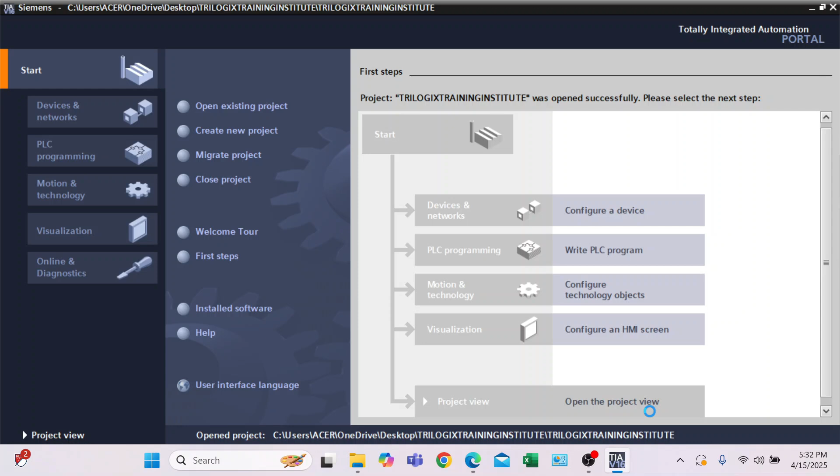So open the project view. Now we're here at our main server.

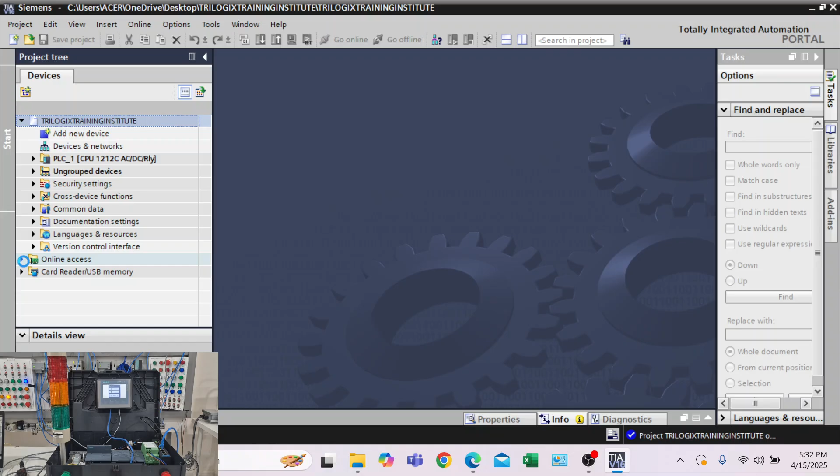If we want to check our online access, let's proceed to online access. Open it. Let's check if there is connectivity between our laptop and our CPU.

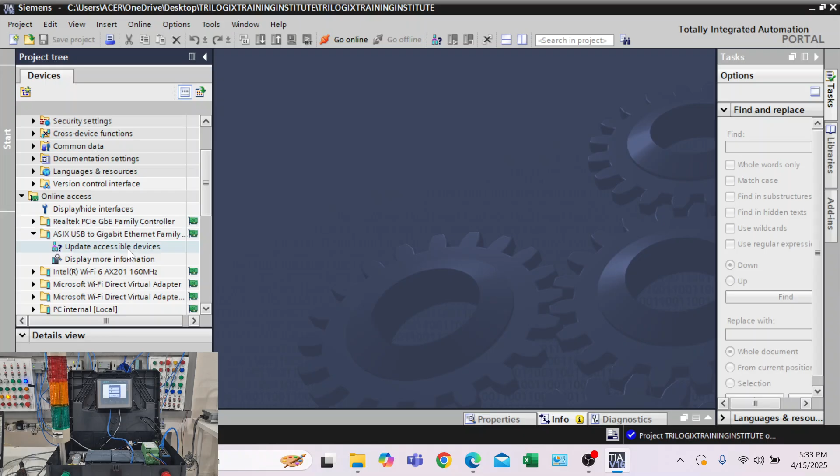Our connection is the converter ASIX. Let's click the converter ASIX, then update the accessible device so it determines who is online and where we can access the CPU. This is our PLC 1 at 192.168.0.1. Let's open that.

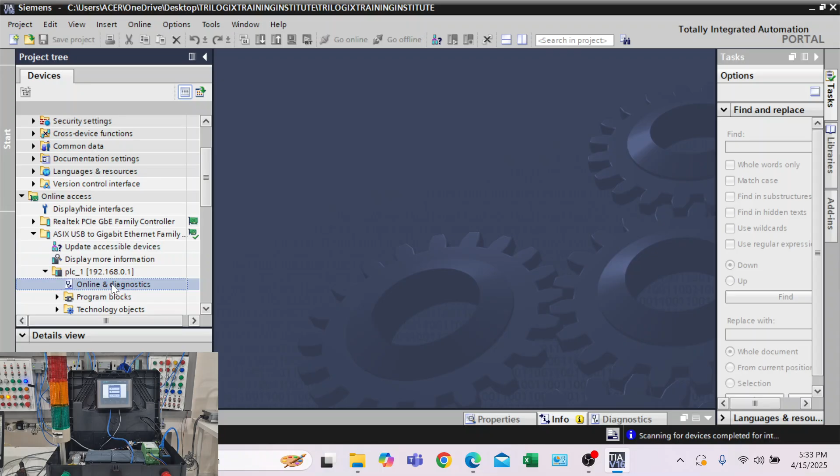Online diagnostic. Click the online diagnostic. As you can see in the functions, our topic now is IP configuration.

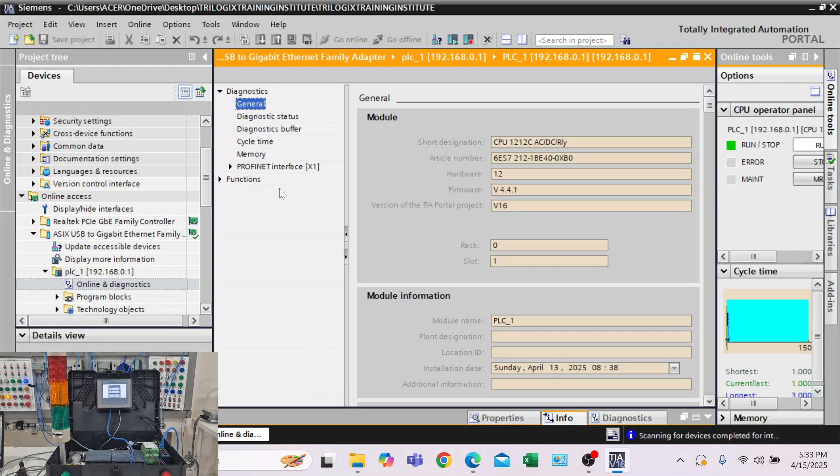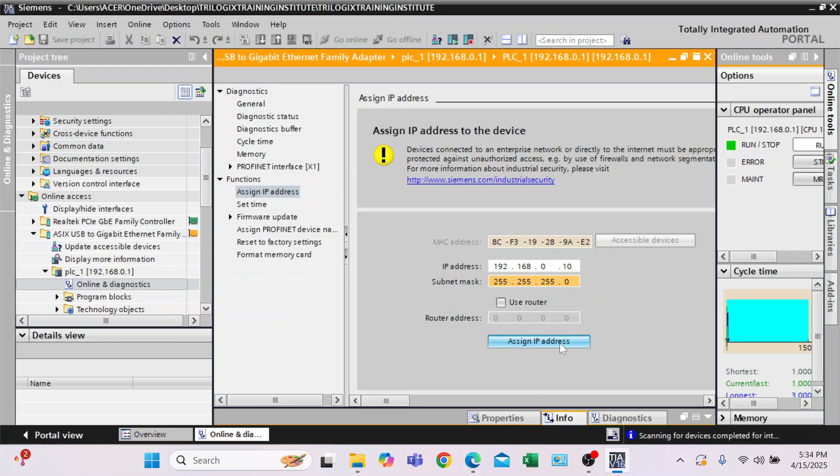Diagnostic. Let's go to our functions, assign IP address, where we can change our IP address. If we need to change to some other IP address, you can put it in assign IP address. That's fine now and good for downloading.

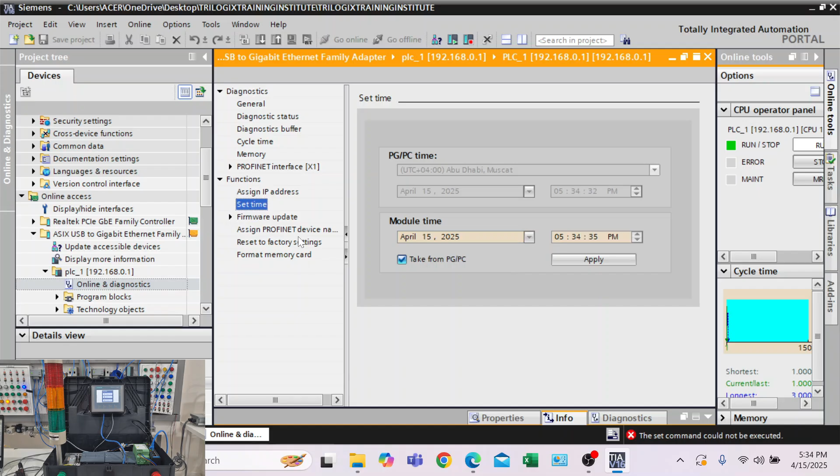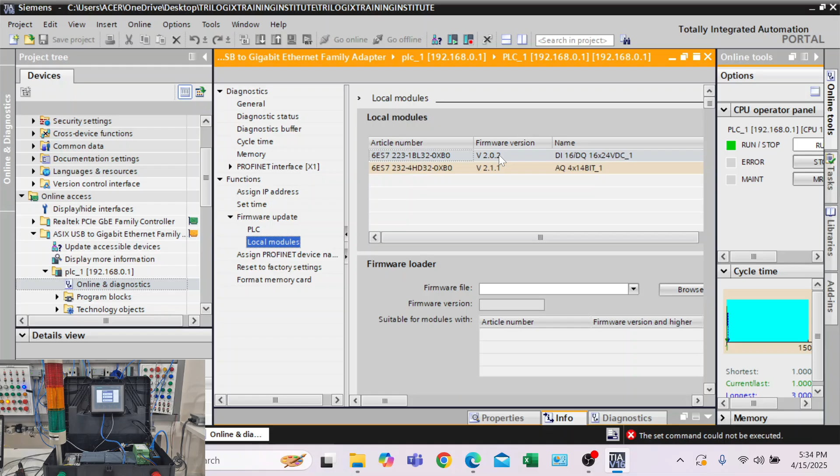As for the topology, we can also reset to factory settings if required. Just delete the IP address, then put another IP address or reset everything.

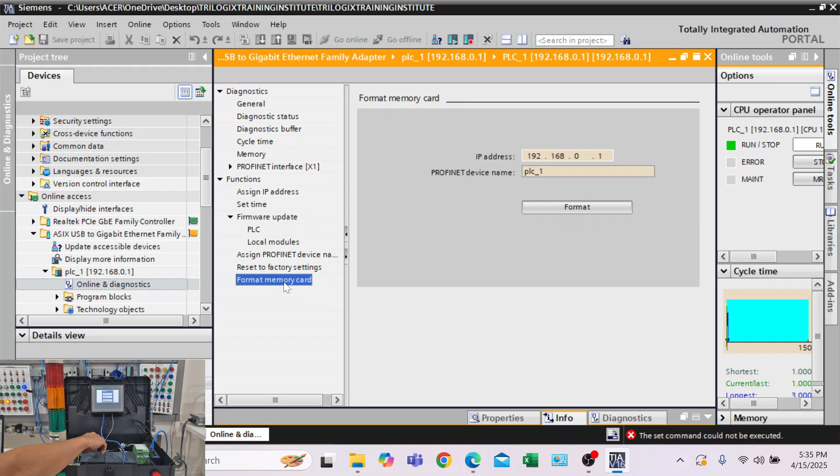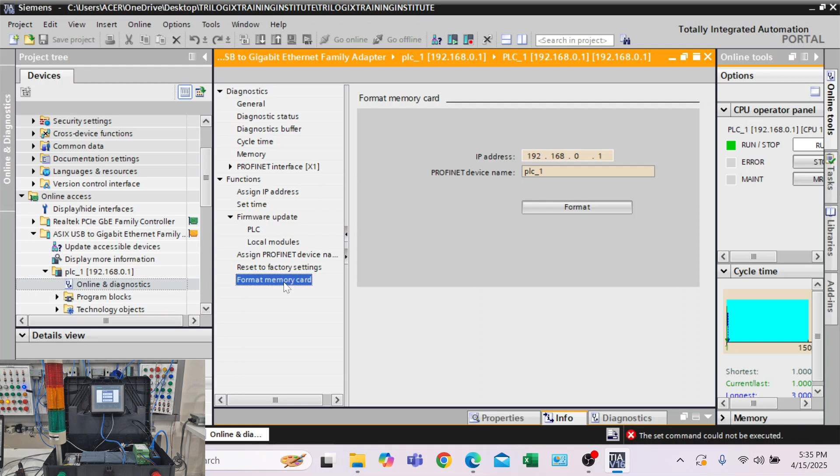If you have a memory card, there's one inside here. If we remove this top, there's memory there, insert the memory card. So that's our IP address configuration.

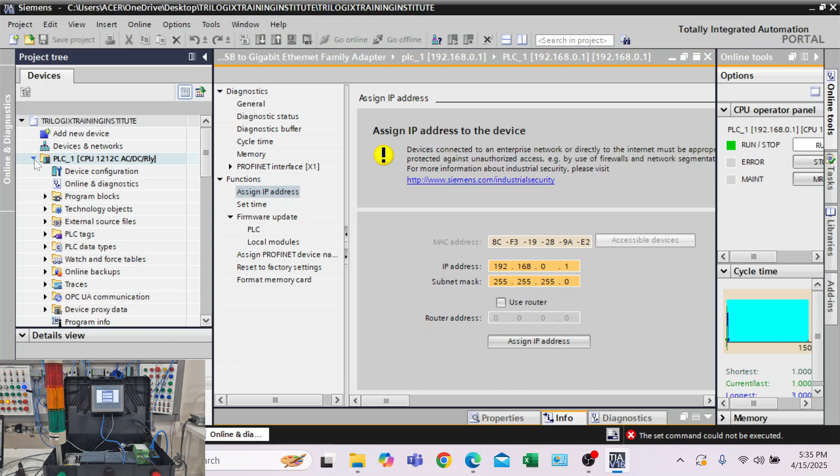Then of course go online diagnostic. Let's go online by clicking the go online button. So now we're online under 192.168.0.1. I didn't actually change the IP address, but I showed you how to configure it.

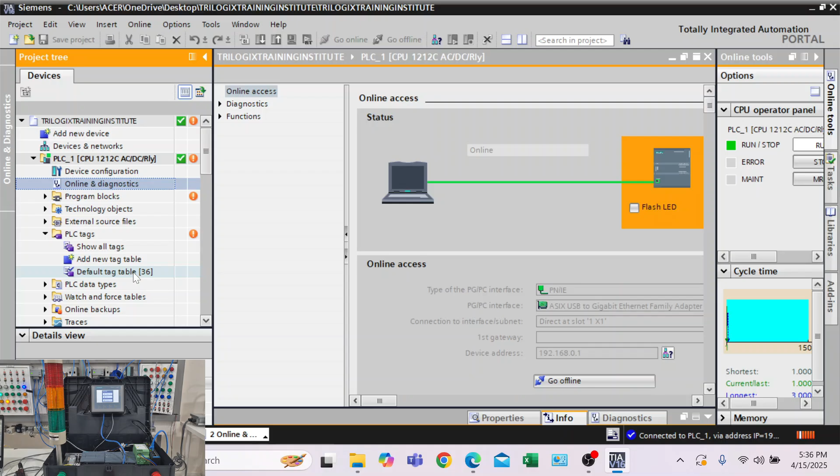Then proceed for PLC tagging. We'll map our tags, first placing them in the default tags. As you remember from my previous vlogs, if you go to device network...

From here itself, device, edit, properties, then IO tags, we can see what possible tags we can use there in our main CPU, and also in what we call the expansion.

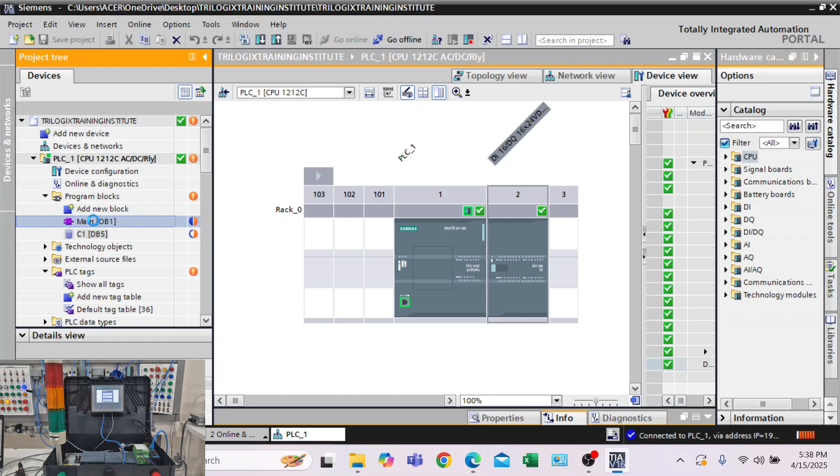Just click this rung button so we have our beginning ladder logic. This is called, in Siemens, normally open contact. Unlike in AB, where it's not called normally open but examine if closed or XIC.

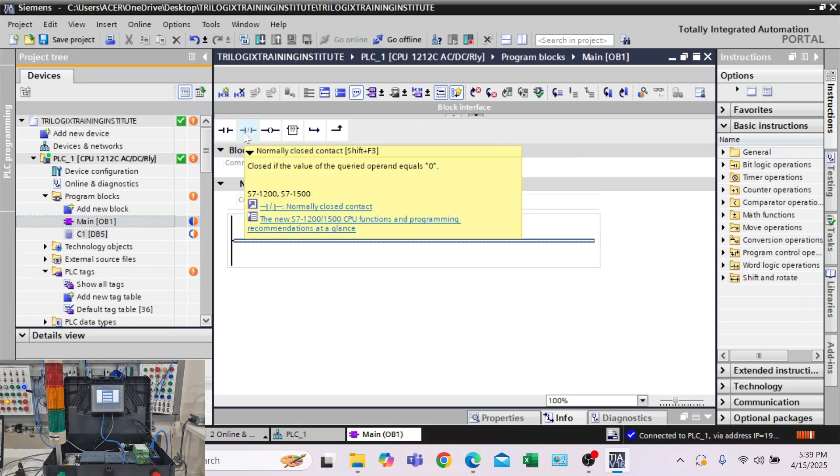I'll show you the difference in instructions. This is our normally open contact, shortcut is Shift plus F2. Then this is our normally closed contact. And this is our assignment or output. Empty box, bridge, open branch, close branch.

So guys, that's the basic instruction here in the general bit section, located at the right side of our TIA Portal.

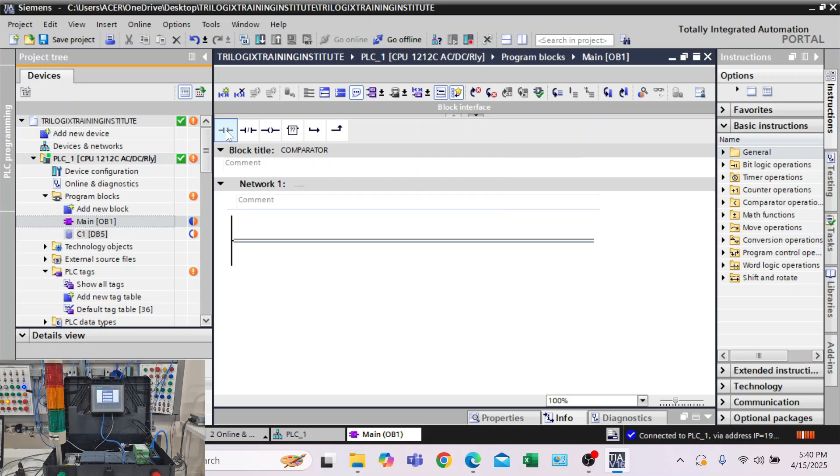Let's make instructions with output. We need to have a start, stop, and emergency. So I need normally open, normally open, normally open, and one output.

This is my emergency, this is my start, this is also my stop, and my output is our green light, representing the coil or relay going to the motor.

I need an open branch and a normally open contact for my holding coil, connected into the main branch, and this will be my green light.

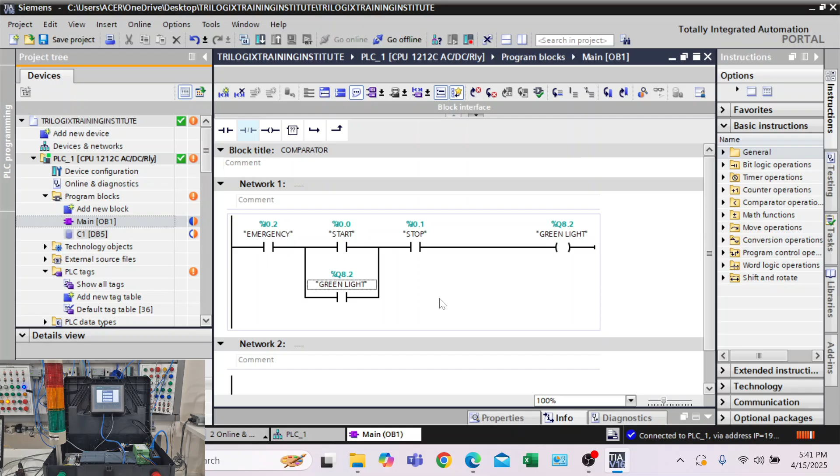What I want to do is when I press the start push button, the green light will be energized, and my yellow or orange tower light will be off while the green light is on.

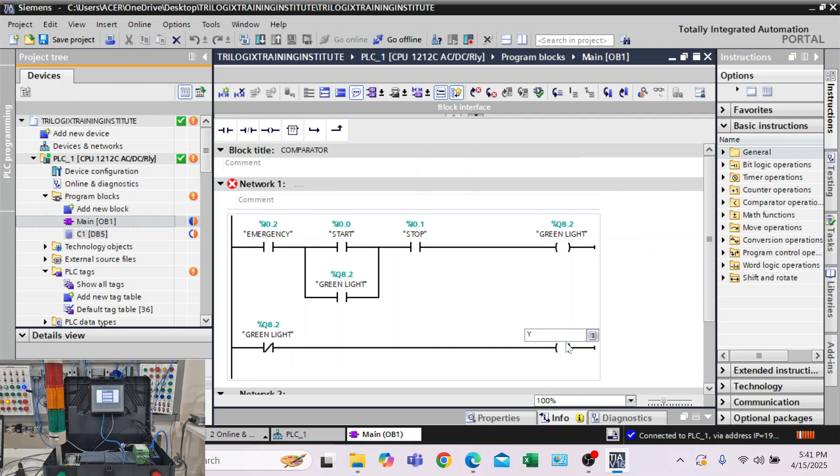So I need the normally closed contact, then I'll use the green light here, and I need the output, and this is my yellow or orange light.

And of course, when I press the emergency push button, meaning the normally closed contact, the red light will activate. So this is my red light.

Now we're ready for our download. First we need to compile our entire project, and we have here the download to device option. This means our project from the software goes to our CPU.

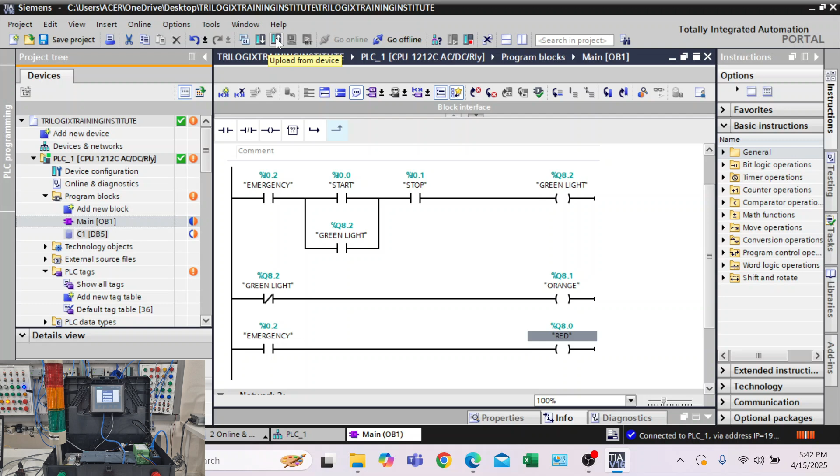We also have upload from device if we need a backup file coming from the online CPU. For the meanwhile, we'll go ahead and download it. Load.

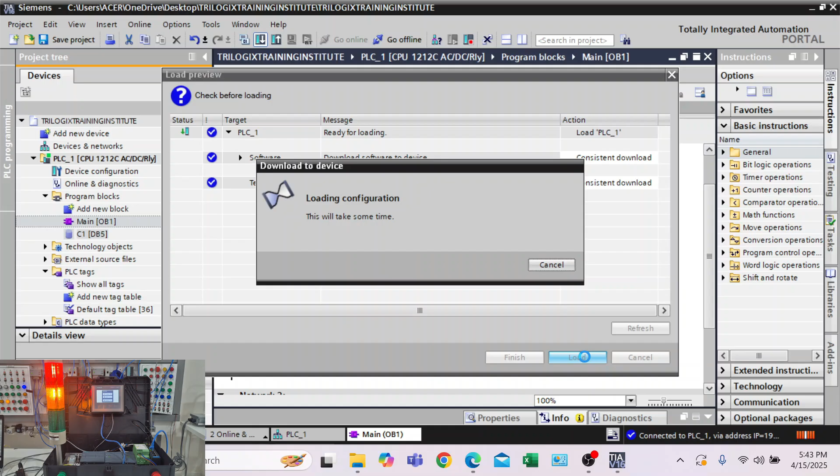In order for us to monitor what is happening to our logic diagram, we can turn on the monitor on/off button.

I need to change the emergency into normally closed in online mode. So what I'll do is double click the instruction and replace it with normally closed.

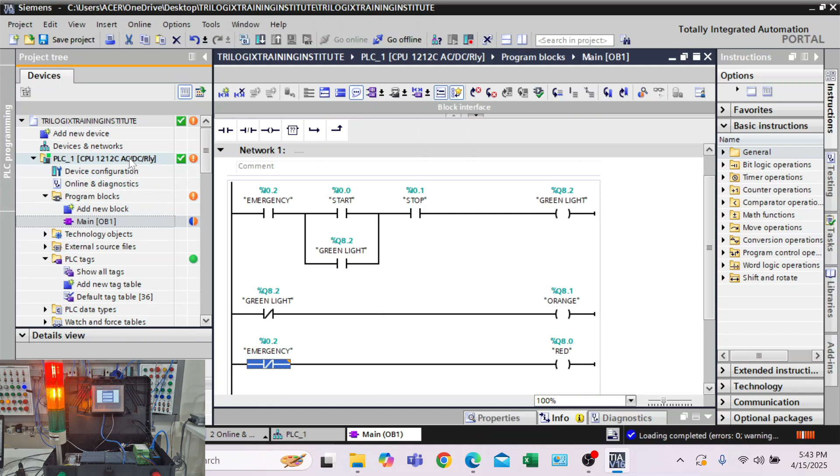In order not to disturb our running CPU, I'll right click on the CPU and download to device, software only changes, then load. So this is the one.

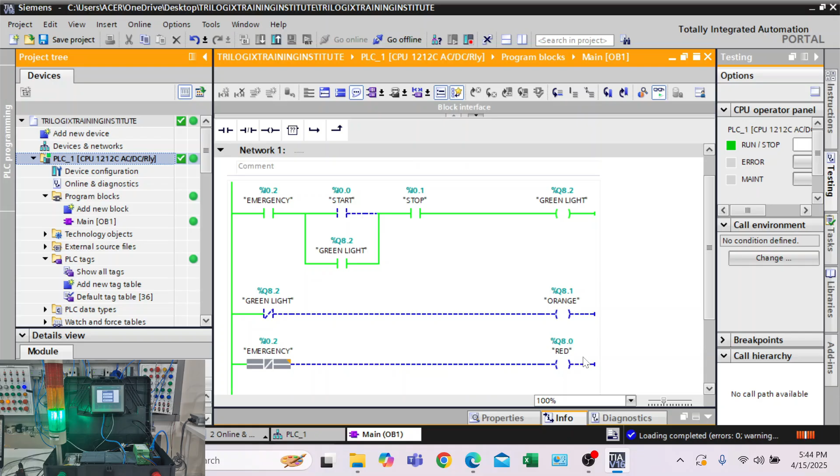Then we'll go ahead and test it. Start. Proceed to the green light, then stop, then start again, then emergency. So that is our basic ladder instructions.